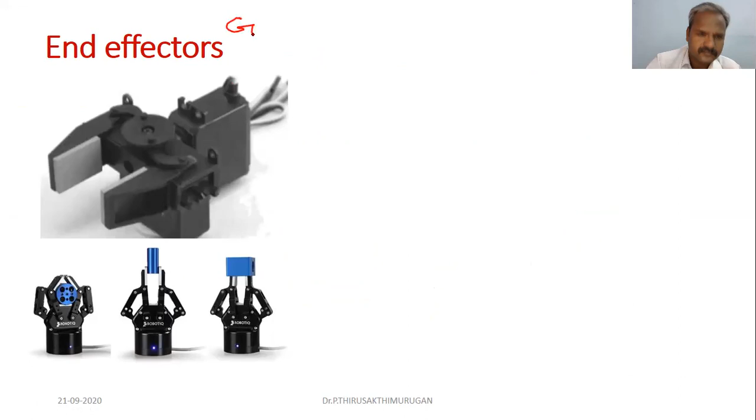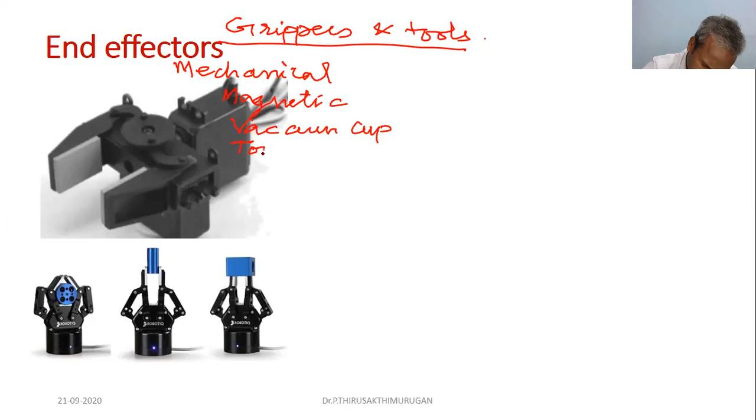So there are different types of end effectors, namely grippers and tools. Types of grippers are mechanical grippers, magnetic grippers, vacuum cup grippers, then specialized tools. These are all called end effectors. An end effector is nothing but the device or tool which is attached at the wrist of the robot.

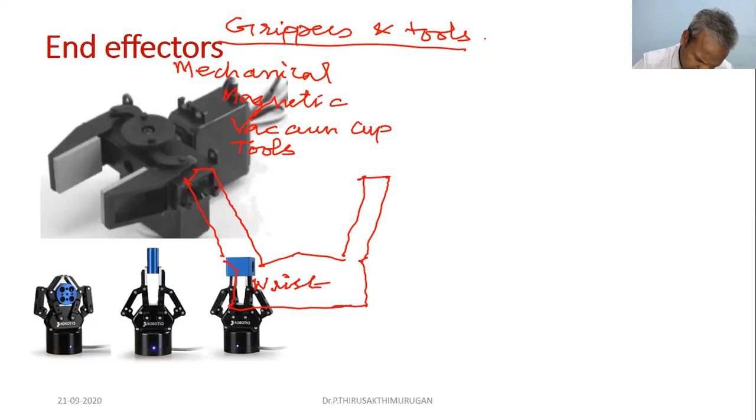So what are the various parts of an end effector? Let's see. This is the wrist. It has a pad. The pad normally takes the shape of the object, suppose it's a ball-like structure. These two are pads. This is called the work part. This is the pad with the work part.

These are the fingers, so it has two fingers. This is called a gripper, a mechanical gripper, attached at the wrist. These are the typical parts of an end effector. According to the operation, we classify mechanical, magnetic, vacuum cup, and tools.

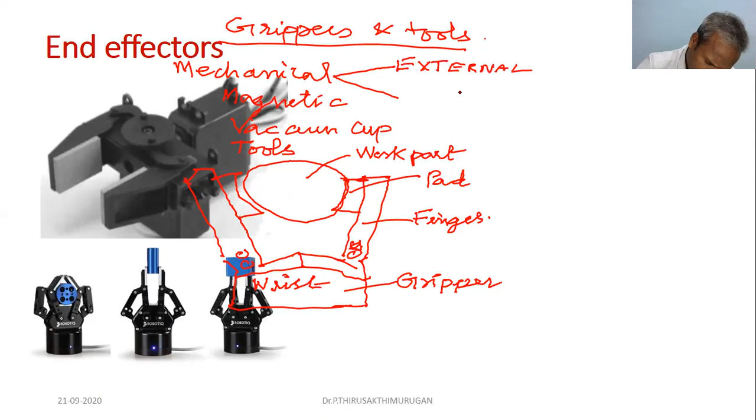Based on the arrangement of the fingers, we can classify into two groups. A mechanical gripper can be of two types: one is an external gripper, another one is an internal gripper. So what is external? Suppose the work part is here, like this.

Suppose the gripper is used to lift the object from inside. The fingers are inside the work part. This is the work part, these two are fingers. So when the gripper is used to lift from inside the object, for example, if you want to lift a plastic bottle, the gripper has to insert inside and lift it. That is an internal gripper.

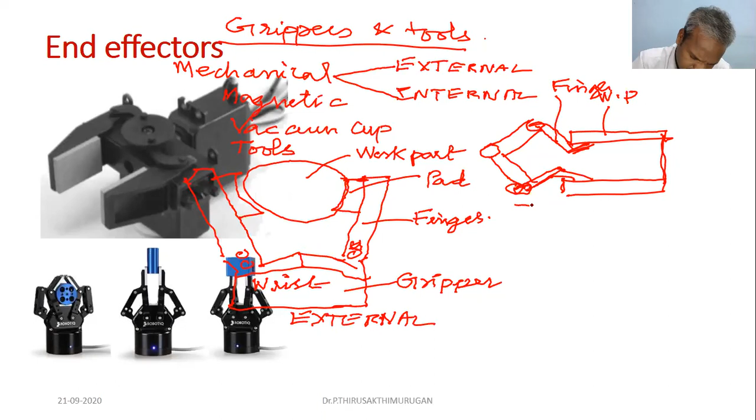This is an example of an external gripper. This is an internal gripper, connected to the actuating mechanism. So this is the basic classification of grippers: internal gripper and external gripper. Apart from this, according to the device, we can classify into mechanical, magnetic, and vacuum cup grippers.

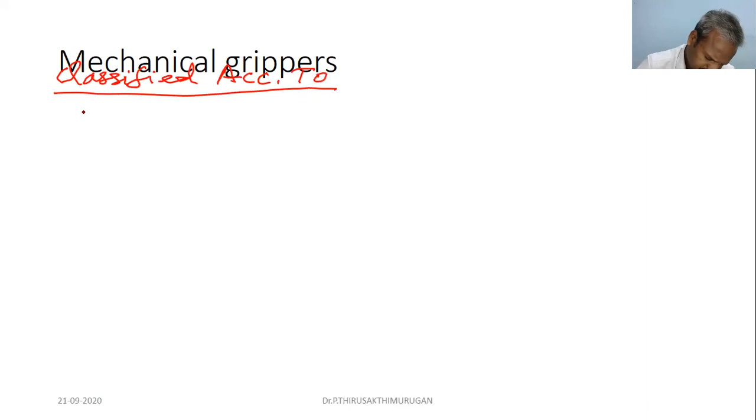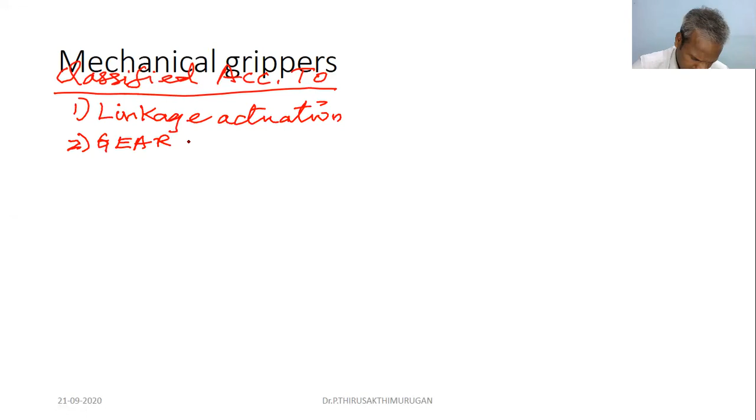So what are the different types of mechanical grippers? Mechanical grippers are classified according to the first, linkage actuation mechanism. Then gear rack and pinion.

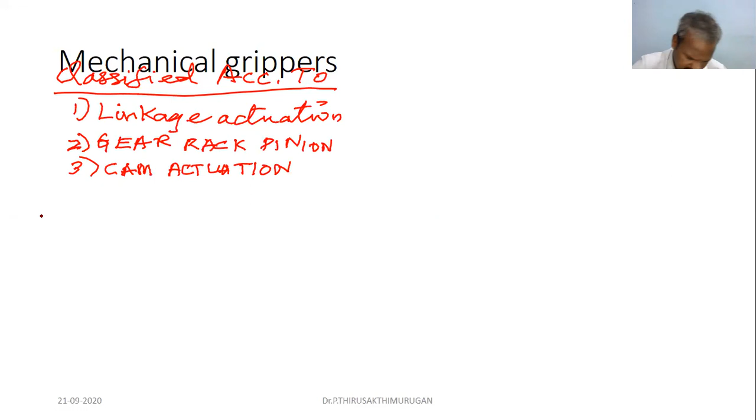Let's see what the different types of linkage actuation mechanism are.

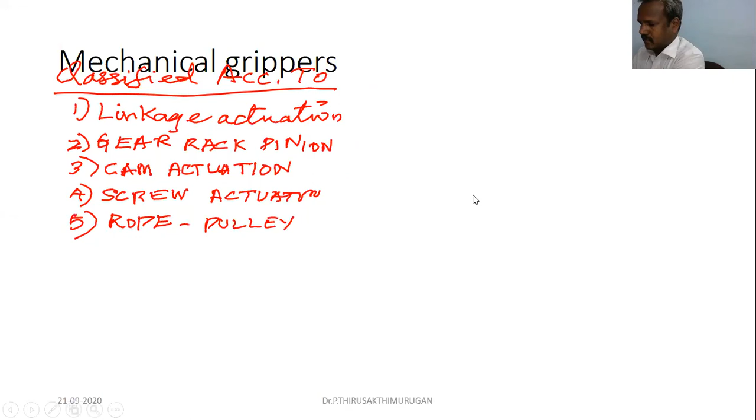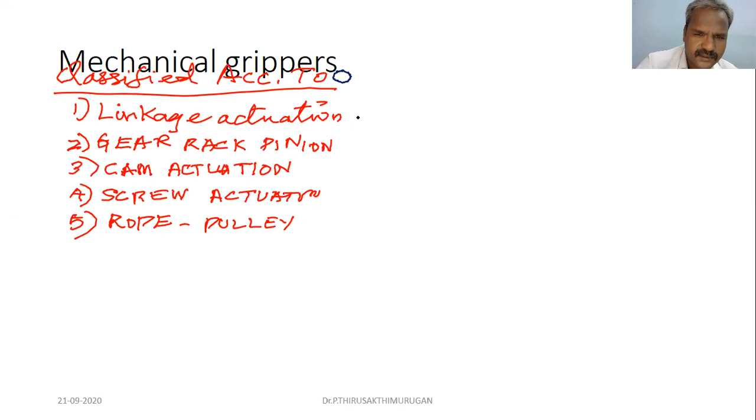First type is we are going to see various linkage actuation mechanisms. Say a pivot, which is attached here. Actually, these two are fingers. So here we apply the force. This is linkage actuation. Linkage means with the pivot, so based on the pivot.

So we want to grasp the object. What we have to do? These two fingers have to move this side. So we have to apply the force. That force is called gripping force, FG, gripping force. So in the grippers we apply gripping force.

So how to generate gripping force? By means of actuation mechanism. So what is actuation? There are different types of actuators we already saw: hydraulic actuators, pneumatic actuators, electrical actuators. So those actuators or drives are used to grasp the object.

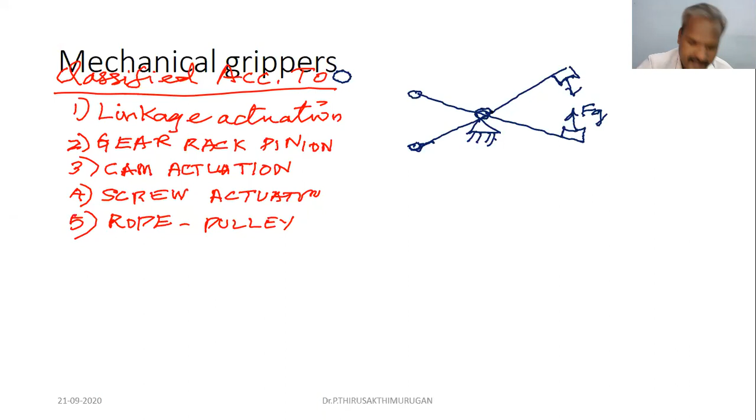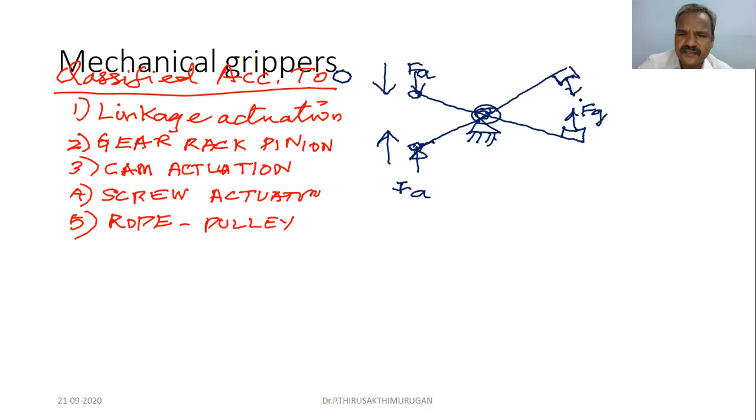So this is actually a pivot, and these two are the gripper fingers. So what happened? When the actuation force is applied towards this direction, let us consider this FA. Some mechanism, hydraulic mechanism, this FA actuation, this is another actuation force. So FA is the actuating force, FG is the gripping force. So when we apply actuation force towards this direction from this side, the grippers are applied to the pot, to lift the pot or to grasp the pot. So this is one type of actuation mechanism.

Let us see another type here. There are 2, 3 links here. These are all called links. Actually, this is the parallel linkage actuation. This one is angular, this one is parallel. Here we have the pivot fixed, 2 pivots are fixed.

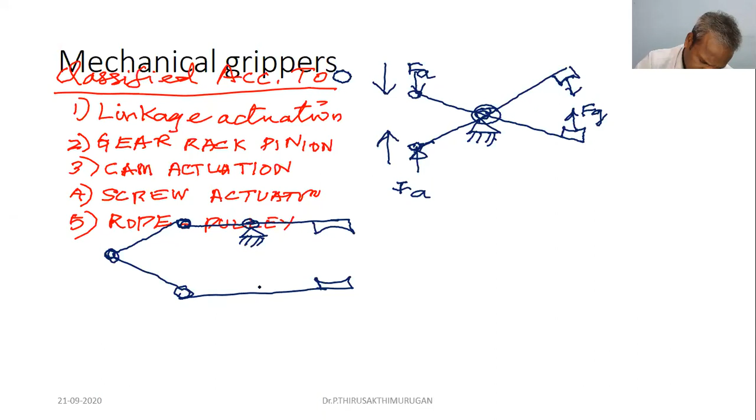Now just imagine yourself, what happened here. We have to apply the gripping force in this direction. So what you have to do, actually this is single actuator, single actuation FA. So what happened when this actuation force is applied towards this direction? This will move up, this link will move up, this will move down. So what happened, this becomes like this, so this will pick up the gripping force applied towards this direction. So this is parallel actuators.

Another type of actuator is also there. This is all simple, so the pivot is attached here. This is also one angular type of actuator. The fingers, it is also two-fingered. These are all typical constructions, so we have links like this. The links are movable ones, all are movable. Here also these links are movable, so this also moves about the point.

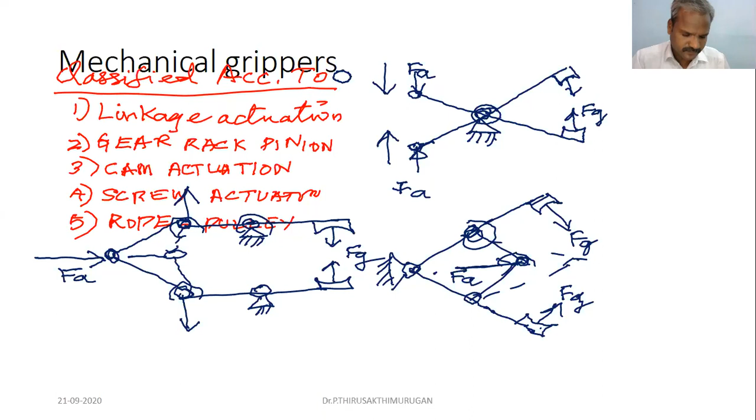This is one type of linkage. So these are all typical mechanical linkage actuation grippers. Next is gear and rack pinion. So what is gear and rack pinion? This is very simple. Gear and rack pinion, so it has a rack. This is a rack where the actuation force is applied in either direction.

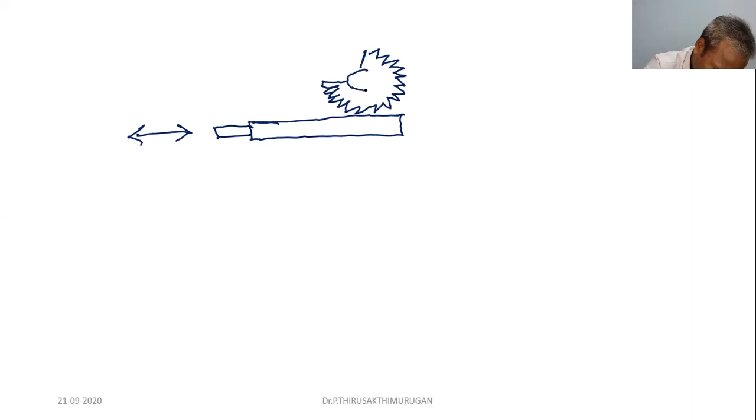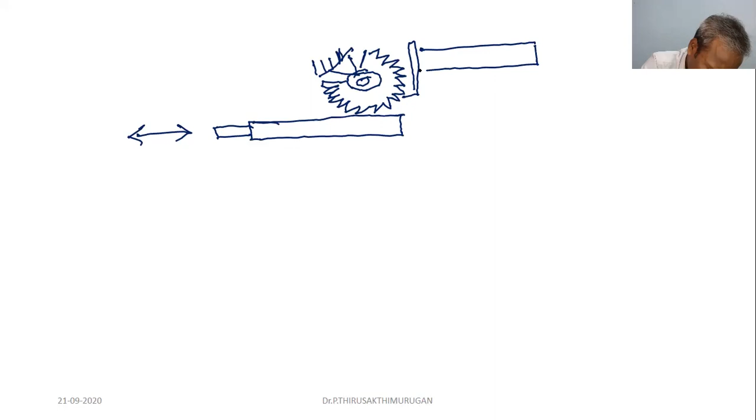So this goes up and down, a gear type of arrangement is here. So the gear is rotating about the pivot, and the pivot is fixed. This is a rack, this is gear attached with the rack. These are two fingers moving up and down along this rack. One more gear, so this arrangement is called rack and pinion.

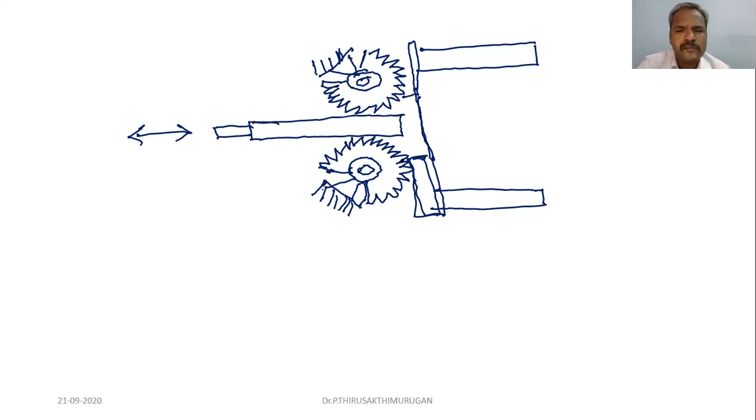So the two gripping force, our main aim is to generate a gripping force by means of applying the actuating force in either direction. This may be connected to any piston-like device, say a piston and ram arrangement, or piston and cylinder arrangement.

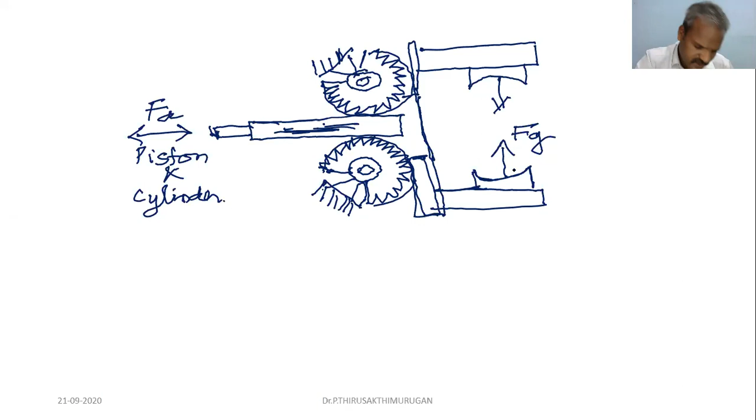If we move the rack in either direction, the gear attached with the rack is moving. So when the rack moves in either direction, this will lift up and down on either side, and the gripping force is applied here. This is a rack and pinion arrangement.

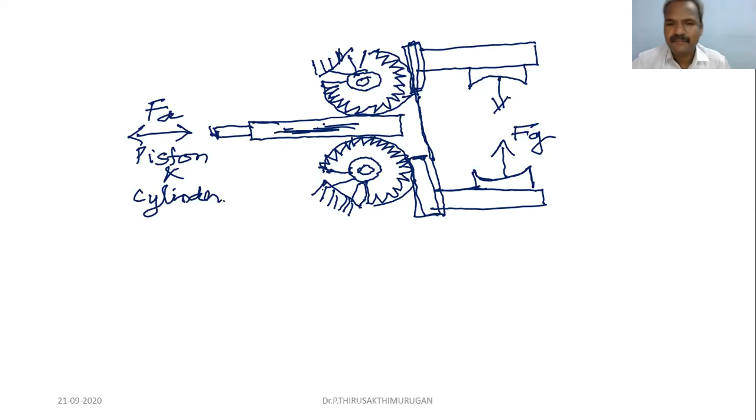Next is cam actuation, cam actuator type of mechanical grippers. This type of actuator is also very simple. It has a cam, a movable cam, which is attached here. On either side, the cam is movable.

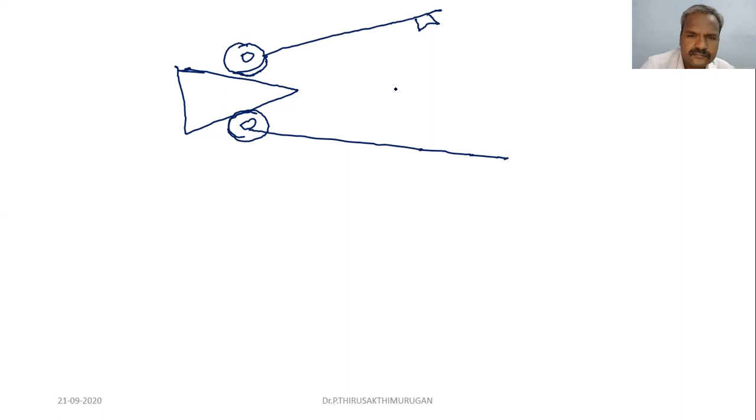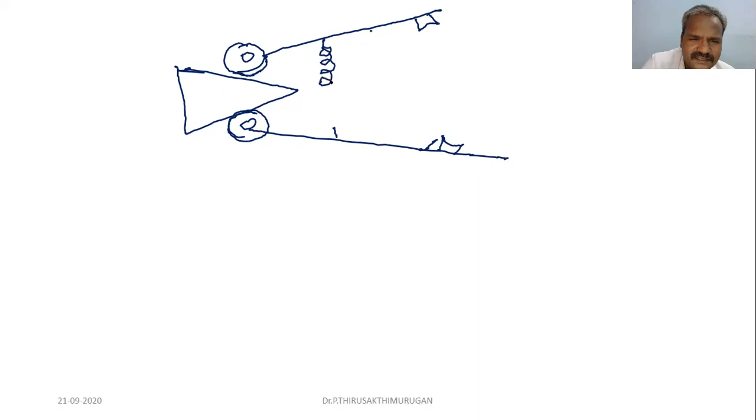So this is a roller, and this is a gripper, a two finger gripper. There is a spring between the two, to help it regain its position. The spring is attached between them, or you can have it like this.

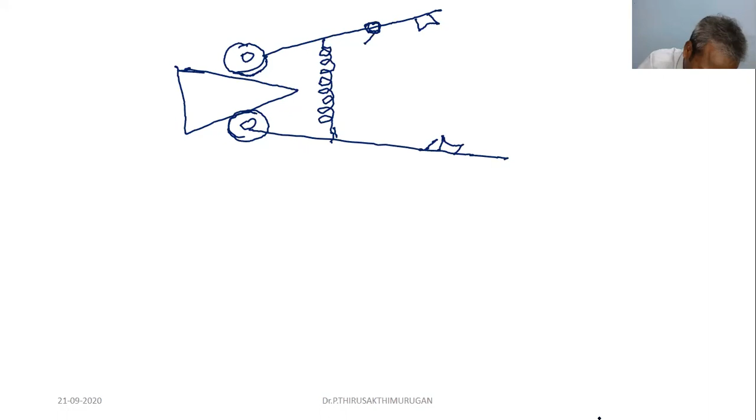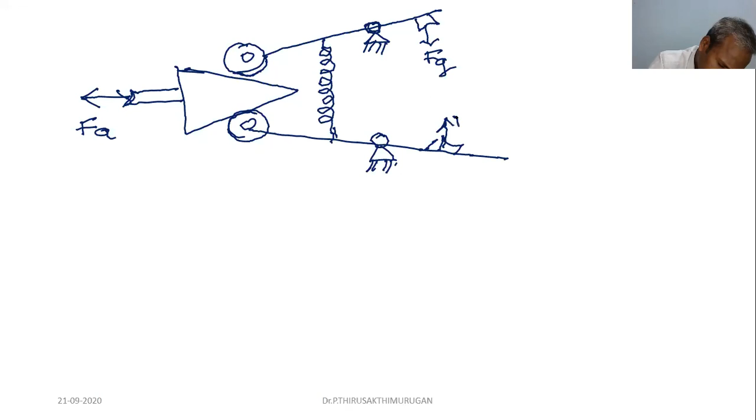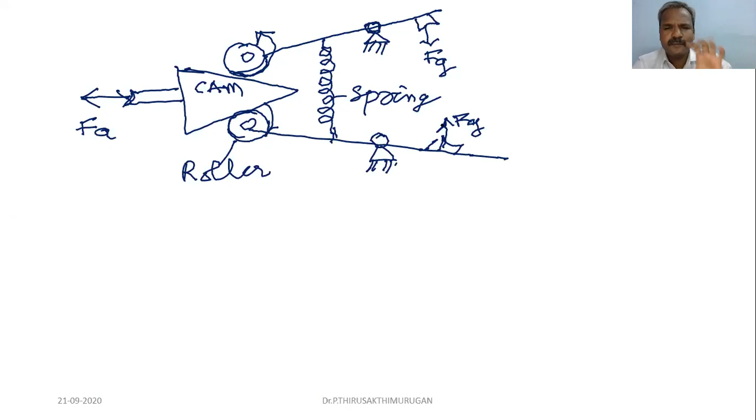Just understand the operation. The actuation force here produces the gripping force. This is a roller, this is spring, this is another roller, and this is the cam - the cam actuated gripper. When the cam moves towards this direction, the roller will move in this direction, so the gripper will come together and the gripping force increases, since this is a pivot attached with the fixed edge. This is a cam actuated gripper.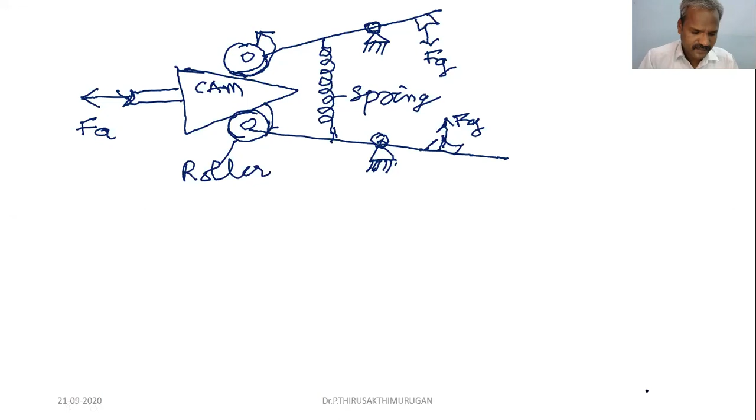Clear? Next is screw type of grippers. What is a screw? A screw-like structure is attached at a fixed end.

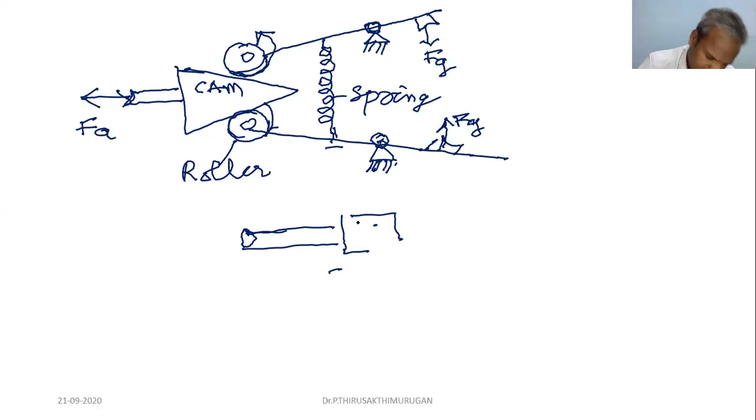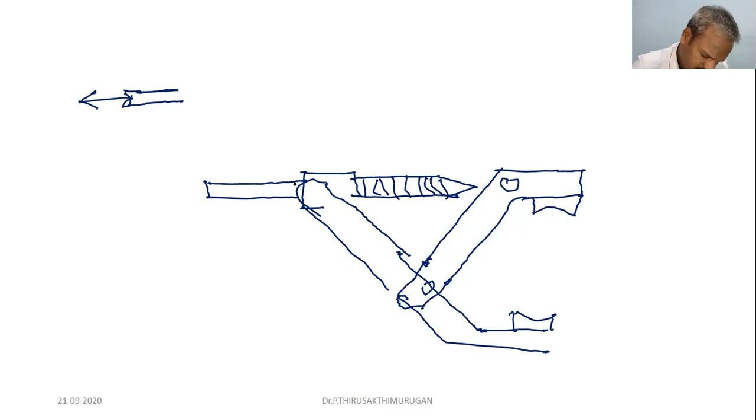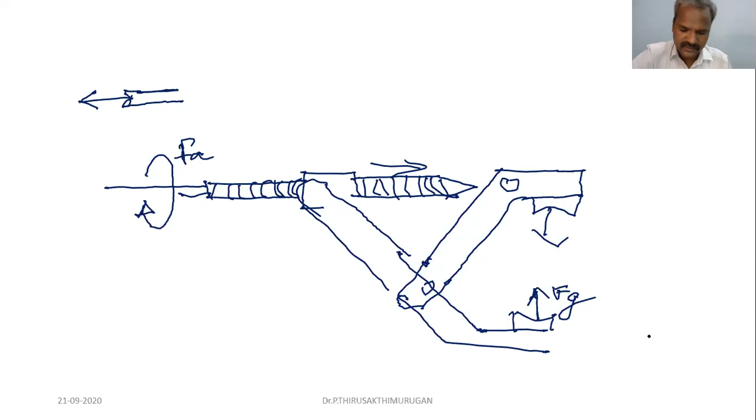Let me draw here. Here is one gripper, and from this end another gripper, so this is a joint. The screw type structure - these are all screws. Just imagine it like a screw. When we apply threading in this direction, the screw will move towards this direction, so the gripping force is applied here. This is the actuation force. So this setup is called the screw arrangement of mechanical grippers. This is about some types of mechanical devices.

So some typical figures in industries. You see, this is a two-fingered external gripper. The work part - this is the work part, and these are the fingers.

This is the cam actuation. See, this is the gripper along with the piston - this is the actuation. Through this piston, the actuation force FA is applied, and here is the gripping force in the pad. This is a piston and cylinder arrangement. There is a shaft - this is the body of the gripper, and this is a pivot pin in the linkage form.

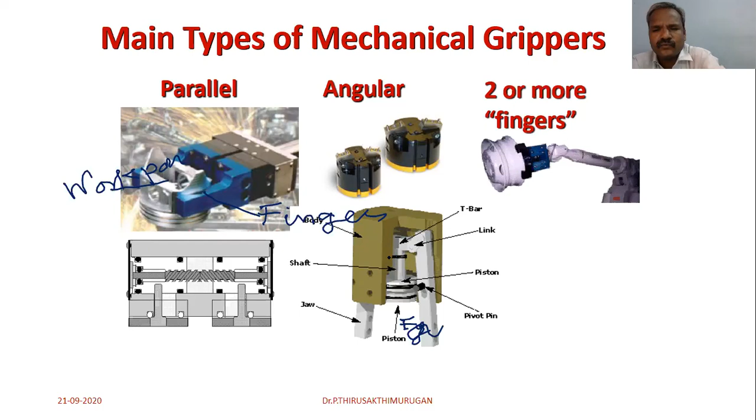This is the two-fingered gripper, internal gripper - a two-finger internal gripper.

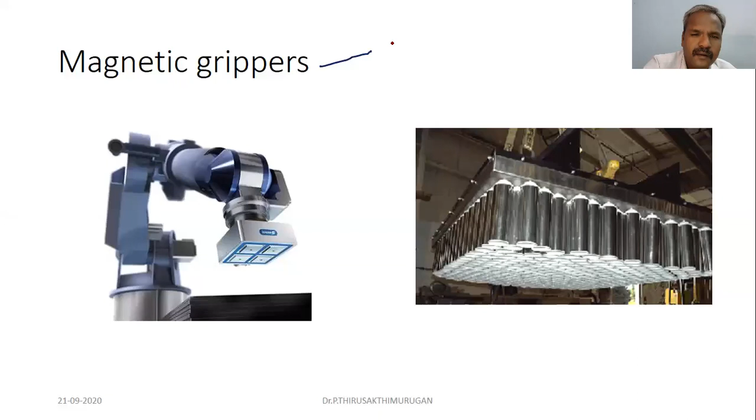Next is magnetic grippers. There are basically two types: one is permanent magnet, another is electromagnet. What are the advantages and disadvantages of permanent magnet and electromagnet? Permanent magnet as well as electromagnet grasp only ferrous objects, iron type of material.

This is electromagnet - this is one typical electromagnetic gripper. And this is a permanent magnet gripper, with different magnetic pieces. This material is grasped by the permanent magnet pad - this permanent magnet pad lifts different objects, which are all the work part.

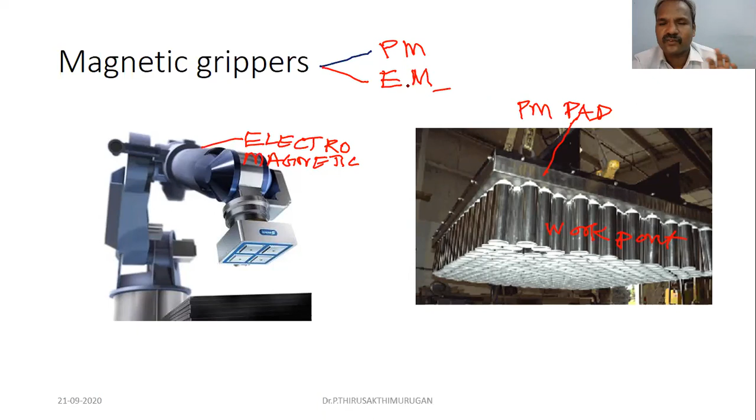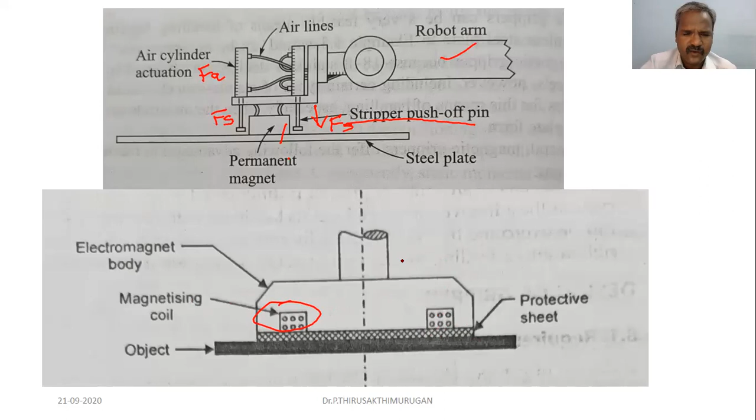So this is the electromagnet gripper. This is the body of the electromagnet, and inside the coil is the magnetizing coil, wound in the electromagnet. This is the object. Whenever you want to pick up the object, you apply the DC power. Maximum electromagnets are made up of DC in the industries, DC power.

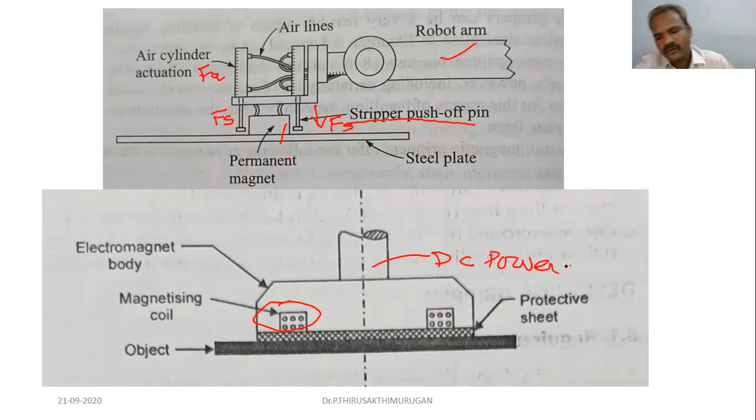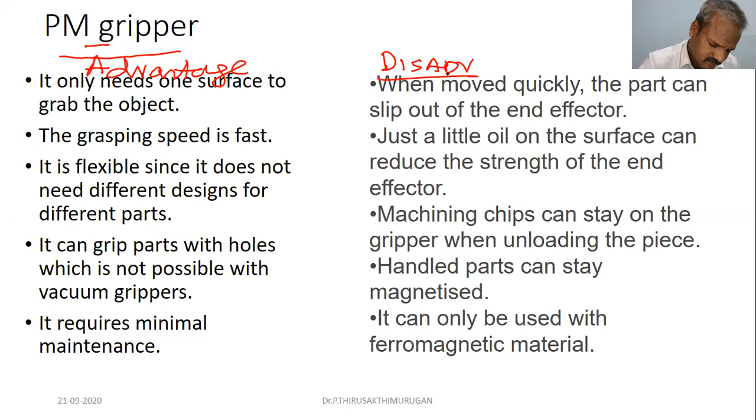So in examinations, sometimes the question may be asked: describe the permanent magnet and electromagnetic grippers, and enumerate the advantages and disadvantages of both grippers. So you have to describe these things.

Next is vacuum cup grippers. Before going to discuss the vacuum cup gripper, let us do one problem. Please take it down. Okay, let's discuss the problem at the end. Okay, no problem.

Vacuum cup grippers are made up of flat rubberized materials. Actually, the vacuum cup grippers require negative pressure, so negative pressure is applied inside, then only it can do the thing. This is a typical vacuum cup gripper.

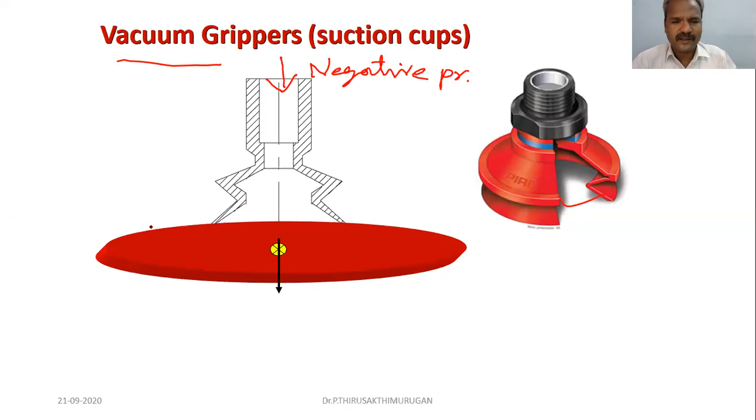So, vacuum cup grippers. These grippers are the typical industrial vacuum cups, you know, suction cups. You can also realize this with a steel tumbler on your stomach; sometimes it will attach to our body. Similarly, inside these grippers we require negative pressure. So this is the pad, the vacuum pad. The pad is attached here.

For the negative pressure, there is a formula to calculate how much negative pressure is required to lift the object through vacuum cup grippers. That is a very simple formula: force equal to pressure into area. Actually, pressure equal to force by area. So the gripping force required to lift the object is Fg equal to P into A. This is the gripping force to lift the object.

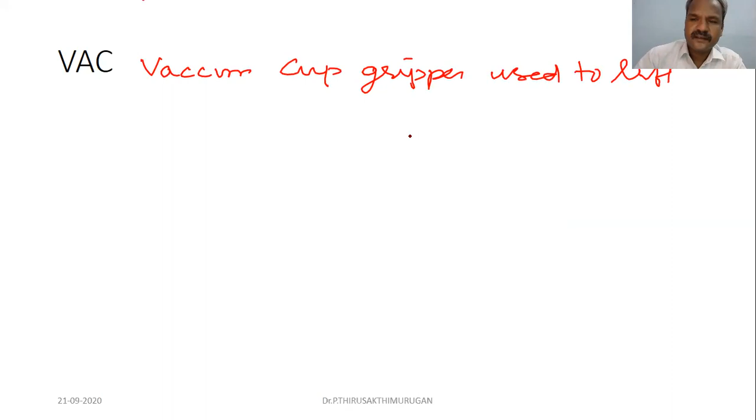Let us do one problem for vacuum cup grippers. A set of vacuum cup grippers is used to lift a stainless steel plate, SS plate. The grade is also mentioned, that is 18-8. Normally our people pronounce it as 18-8 steel plate.

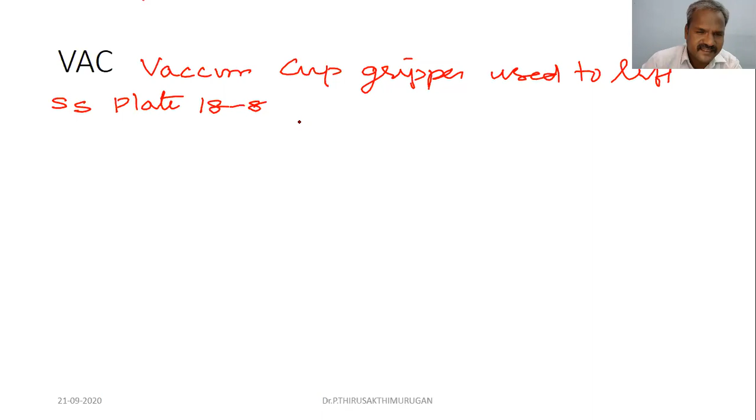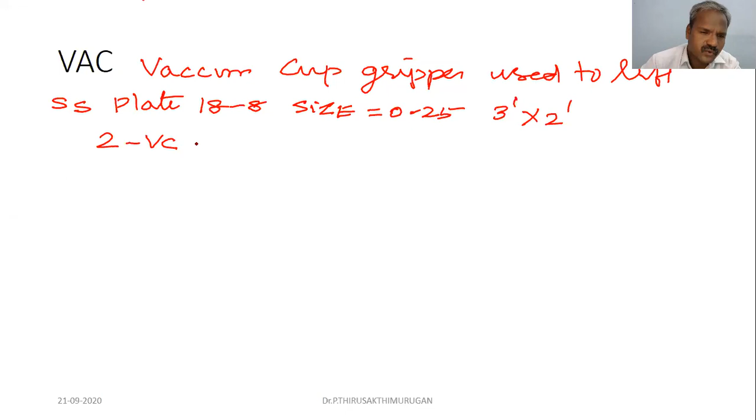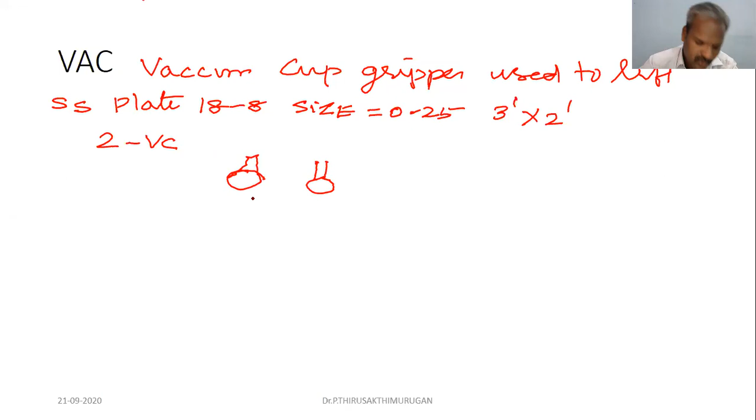The steel plate size is 0.25 inch thickness and 3 feet by 2 feet width and breadth. There are 2 vacuum cups, separated by a distance of 1.5 feet. So 2 vacuum cups are arranged to lift the steel plate: one vacuum cup is here, another vacuum cup here, separated by 1.5 feet for stability.

The suction cup is round in shape. The diameter D is 5 inches for each suction cup. The atmospheric pressure, compared with the negative pressure, is 14.7 lb per inch square. So the atmospheric pressure is given in lb per inch square. What will be the negative pressure? We have to determine the negative pressure.

So how to determine negative pressure? We have to follow this relation. Also it is given, assume a safety factor of 1.6. Solution: use the relation F equal to PA. We have to determine the pressure. So what is force? Force is nothing but weight. So first, calculate the weight of the stainless steel plate.

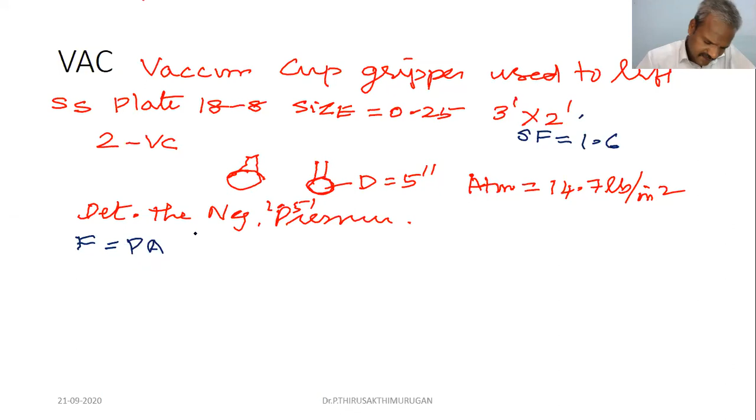It is also given the density of the steel: 0.28 lb per inch cube. Density is mass by volume. So first let us calculate the weight. From the density you can calculate it. What is the volume of the stainless steel plate? Breadth, width and thickness. If you multiply these three together, you will get the volume of the stainless steel plate.

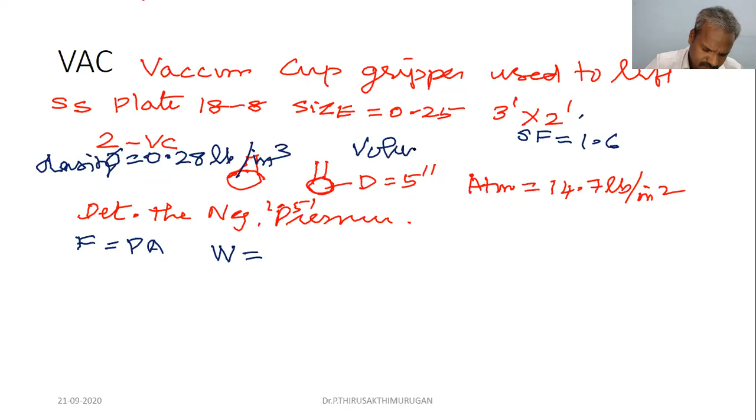Volume equal to 0.25 inch into the breadth, 2 feet, which is 2 into 12, 24 inches, into 3 into 12, 36 inches. Please tell me the answer: 0.25 into 24 into 36. Anybody? 216, sir. 216. Good. This is the volume.

So weight equal to density into volume, right? Mass by volume equal to density. What is the density value here? Density of the steel is 0.28. So 0.28 into 216. Please tell me the value, the weight of the steel. 60.48, sir. 60.48 pounds, lb.

Next, we have to find the area of the vacuum cups. It's round in shape, so area equal to pi d square by 4, because pi r square equals pi d square by 4. So how much? Tell me. Pi into 5 by 2 whole square, pi r square, or pi d square by 4. Both are same.

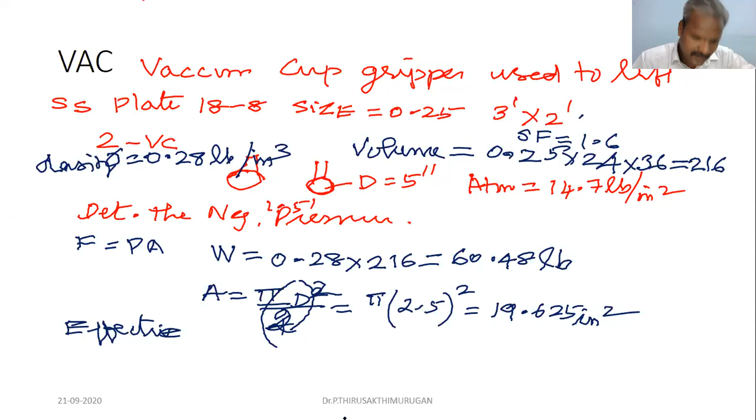Okay. Effective area equal to 2 into A, since there are 2 cups. So 2 into 19.625. Please tell me the value. 39.26. 39.26 inch square. All right. So effective area. Now calculate the negative pressure. So what is negative pressure? P equal to weight by area. Weight by area. Tell me. 60.48 divided by 39.26.

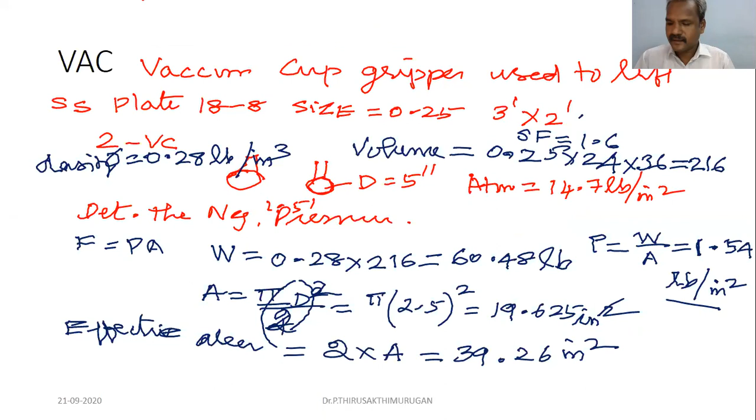Safety factor means, by actual design we got 1.54 lb per inch square. This is the actual design. So the exact negative pressure we apply should be 1.54 into 1.6. That is the required negative force which is to be employed in the vacuum cup grippers. So it will be around how much? The actual negative pressure is P equal to 2.46. So this is the correct answer. Around 2.5.

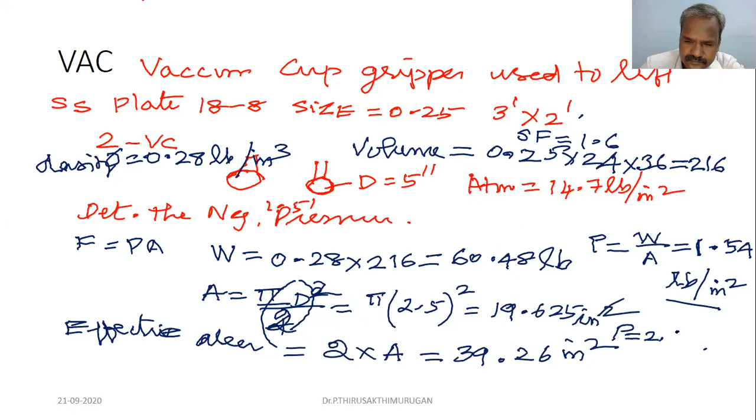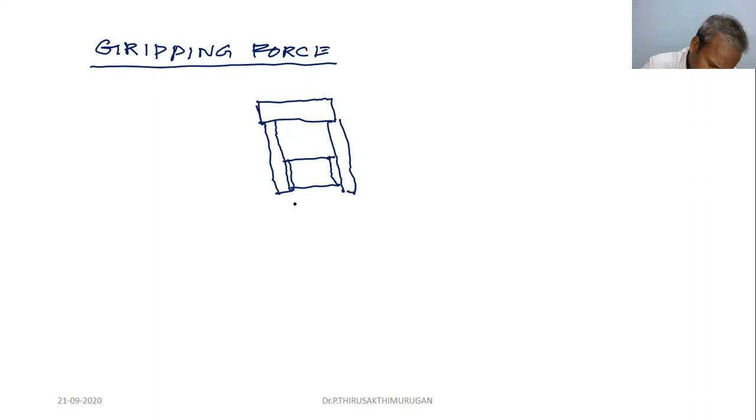Next is gripper force calculation. Gripping force. Actually, this is a finger, two fingers, and the work part is between two fingers. The weight of the work part is W. So this is gripper, this is work part. So we apply gripping force on either finger, on either side. Gripping force.

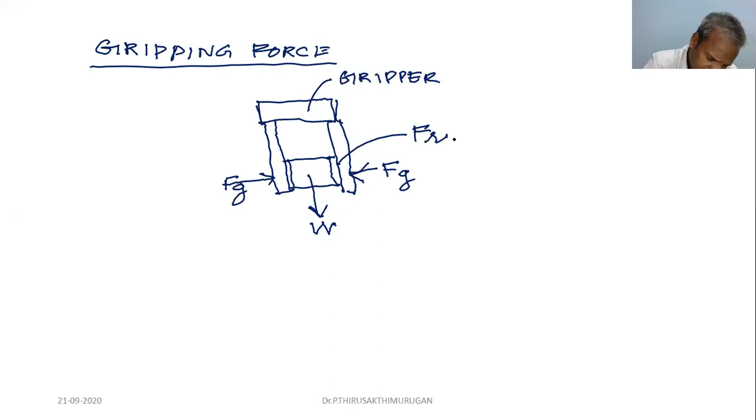There is a thumb rule given. Actually, there is friction between the fingers and the work part, that is mu. Let n be the number of fingers. So mu is friction. Gripping force is applied on either side of the two fingers. So what is the balance equation? n mu Fg equal to W. This is the gripping force balance equation. n is number of fingers, mu is friction, Fg is gripping force, W is weight.

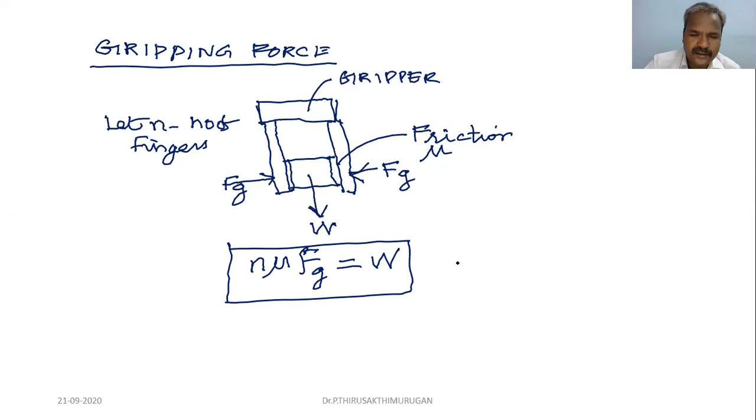Along with this, we have to add one safety parameter, called the G factor. So what is G factor? Engelberger, a scientist, devised a thumb rule. When the robot lifts an object upwards, the G factor, which is not gravitational force, is 3, because it requires more force. If the object moves downwards, the G factor is 1. When the object moves horizontally, the G factor is 2. This is the thumb rule devised by Engelberger.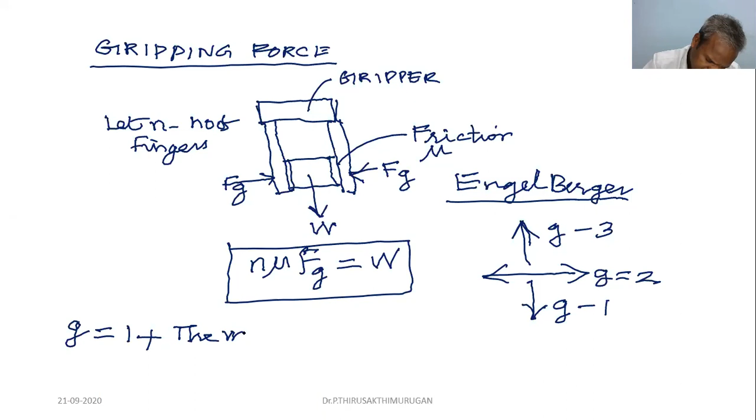Another relation is also there for the G factor. This is the accurate formula: G equals 1 plus the maximum acceleration performed by the manipulator, the gripper, divided by acceleration due to gravity.

Acceleration due to gravity. Okay. So we can design the gripping force either way, right? Either by using the Engelberger relation, or suppose the maximum acceleration of the gripper is given; suppose the gripper moves with an acceleration of 40 pounds per inch cube, right? Sorry, 40 inch per second square, right?

Acceleration due to gravity. So suppose the maximum acceleration is 40. The acceleration due to gravity in FPS unit is 32.2. Okay, 32.2 meter per... no, sorry, it is in inch, right? So let us consider the maximum acceleration of the gripper is 40 inch per second square. Whereas the acceleration due to gravity in SI unit is 9.8 meter per second square. In FPS unit, acceleration due to gravity is 32.2 inch per second square.

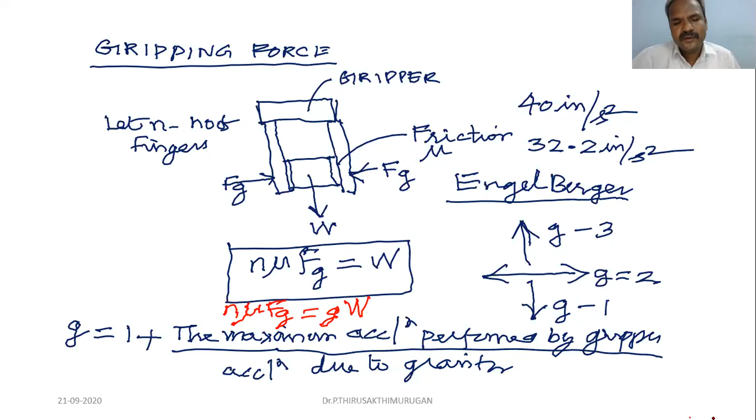So the G factor, according to the thumb rule, when the object is lifted upwards by the gripper, G equal to 3. When the object is placed down, moving downward, the G factor is 1. When the object is moving horizontally on a horizontal surface, the G factor is 2. But if there is acceleration, say a pick and place robot picks and places it very fast with some acceleration, then we have to calculate the G value by using this relation. So this is the gripping force calculation.

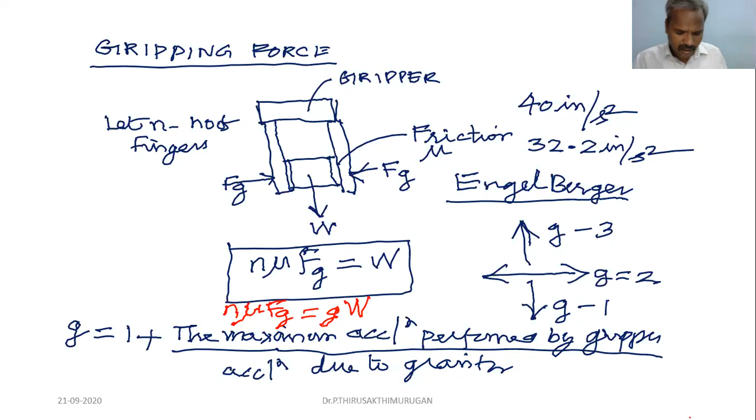Okay, let us do one problem, then you can easily understand. Take down: a stiff cardboard weighs 10 pounds. The friction between the finger and the stiff cardboard is 0.25. Okay, friction is 0.25. A stiff cardboard weighs 10 pounds, 10 lbs. The mu between the two fingers and the work part is 0.25.

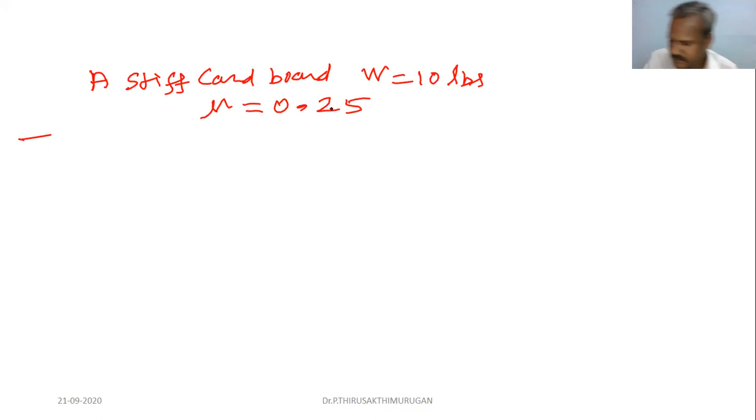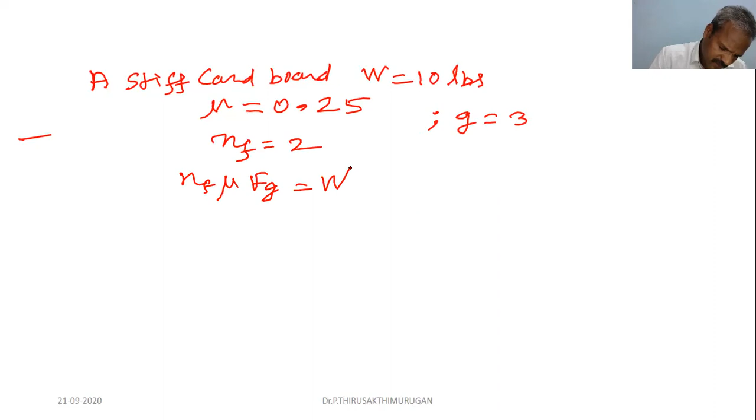Okay, so because it is lifting upwards, G factor equal to 3. Number of fingers NF equal to 2. Okay, so what will be the gripping force? Please calculate and tell me using the relation NF mu Fg equal to W. W is 10 pounds, mu is 0.25, NF is 2. So 2 into 0.25 into Fg equal to 10 pounds.

And G is given. Okay, how much? 3. So what is Fg? 30 divided by 0.5. So 60 lbs. Clear? Suppose the pick and place of the cardboard by the robot gripper is with an acceleration of 40 inch per second square. So what will be the G factor? That you can calculate, right? So this is a typical problem for calculating gripping force.

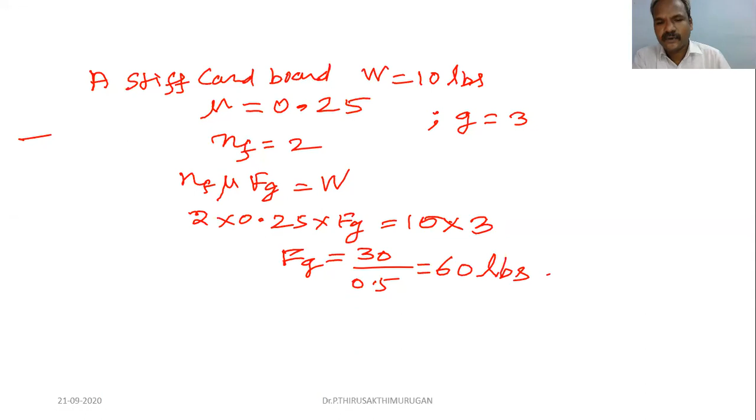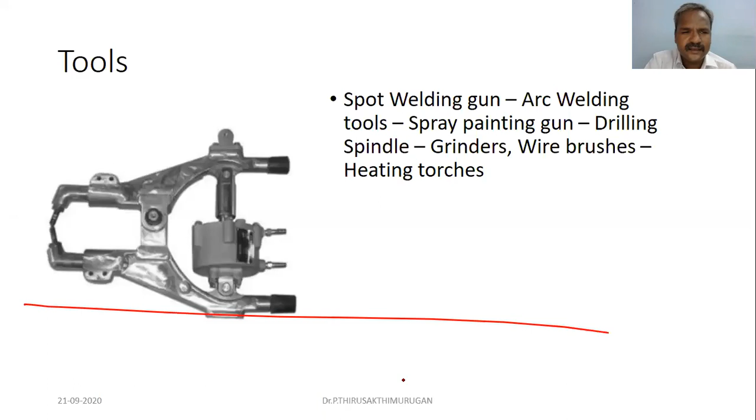So next is tools. So what are the tools? Tools are nothing but specialized devices which are attached at the wrist of the robot. For example, spot welding gun, arc welding tools, spray painting gun, drilling spindle, grinders, wire brushes, heating torches. So these are all specialized devices. Even you can add scoops, spoons, and hooks. Hooks are also attached to the robot wrist to pick and place.

Even a balloon-like special device is also used. Can you tell me where? Suppose a very thin bottle is there, a small-neck thin bottle. Okay, this is a bottle, a fragile material. If you use mechanical fingers on the bottle, what happens? It's a fragile material, it will break, right? So we may not be able to use mechanical fingers or any other device. So what is the specialized tool in that condition?

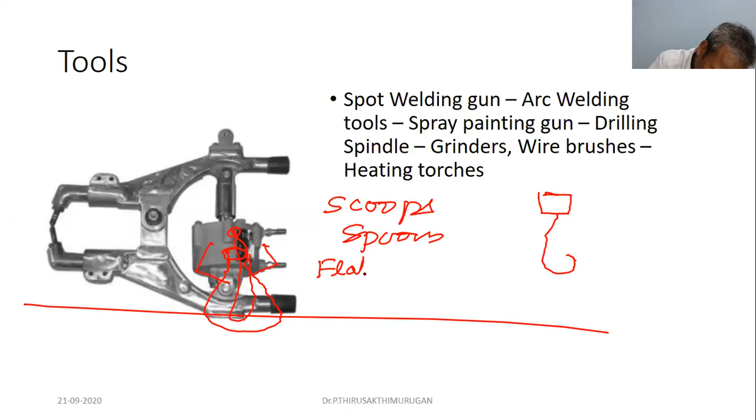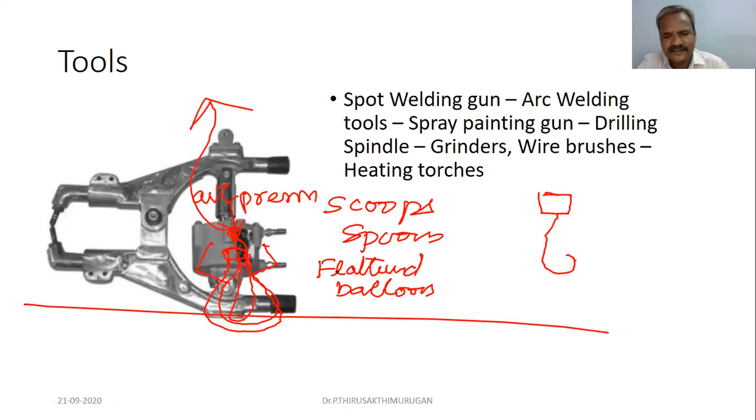So you just place a very powerful flattened balloon inside. So that is also a specialized tool. Flattened balloons. So after inserting it inside, we have to apply air pressure inside the balloon. So the balloon gets full, filled with air. So now we can easily lift upwards. Understand? So these types of things are called specialized devices used in the robot.